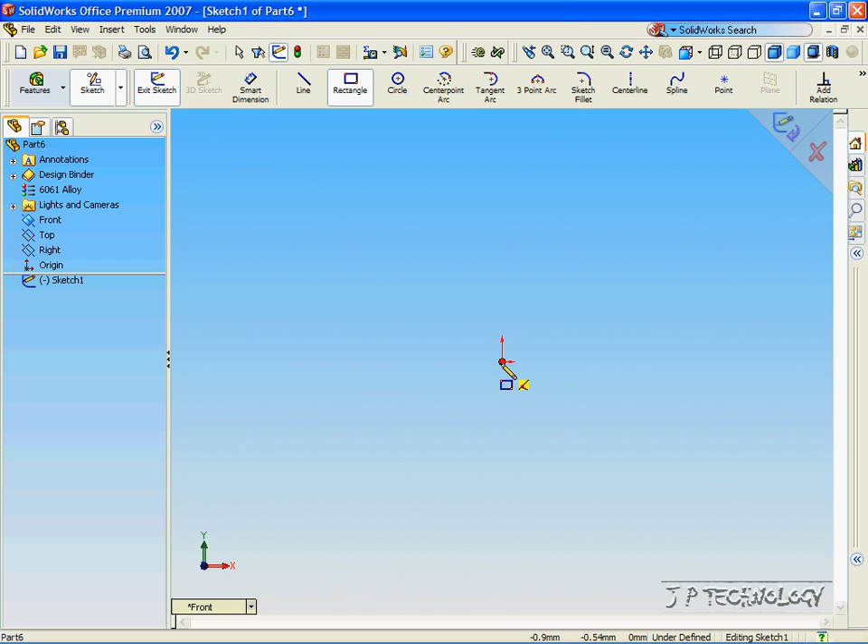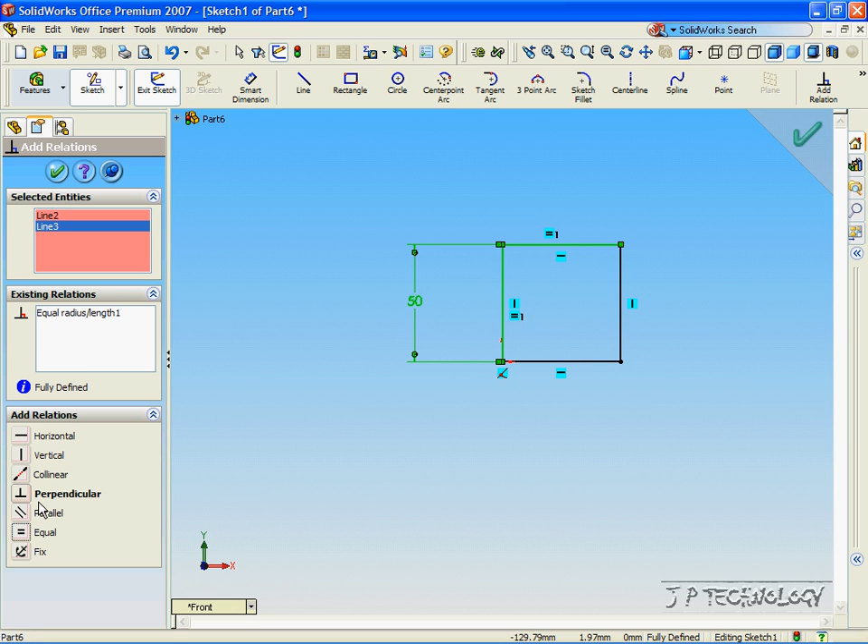Now, to extrude a part in SOLIDWORKS, we first need to make a sketch. So let's click Sketch, click Rectangle, click the front plane, and from the origin, let's draw a square. Now, to make this square exact, let's use the Smart Dimensioning tool and make it 50 millimeters. With the Add Relation button, click the length that we already made, and click the perpendicular line, click Equal, and now we've made a perfect square. Click OK.

Now, to extrude the drawing, click Features, click Extrude Base, and you can see what our extrude will look like. In this tutorial, I will be covering just a few of the actual extruding options. All the different extrudes are listed below. The ones I'm going to cover are the blind extrude, up to surface extrude, and the mid-plane extrude. The up to surface extrude is exactly the same as the up to vertex and up to body extrude, so I'm just going to show you one and you can do the rest for yourself.

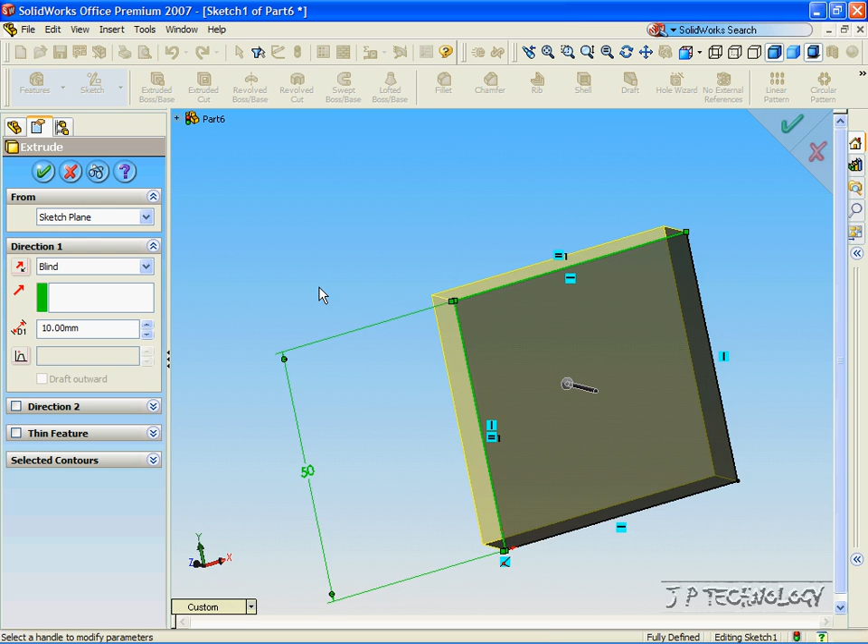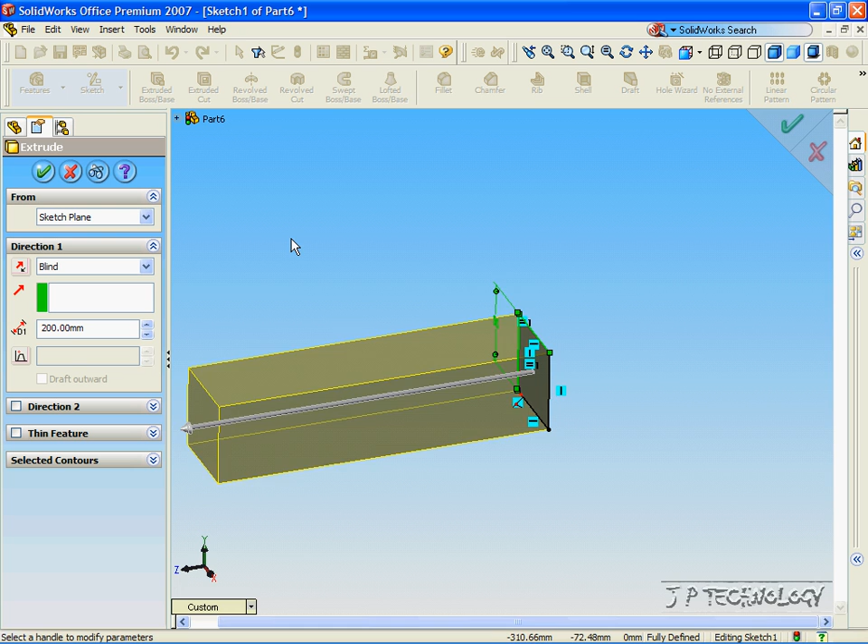Okay, so for the first one, we're just going to do the blind extrude. Click blind. For the blind extrude, it just comes out from the drawing as much as you want. Right now it's at 10 millimeters, and as you go up, it comes out more, and as you go back, it goes back more. So for this square, let's make it 200 millimeters. Click enter, and now you see a preview of what it will look like. Now to accept it, press the check mark, and you're done.

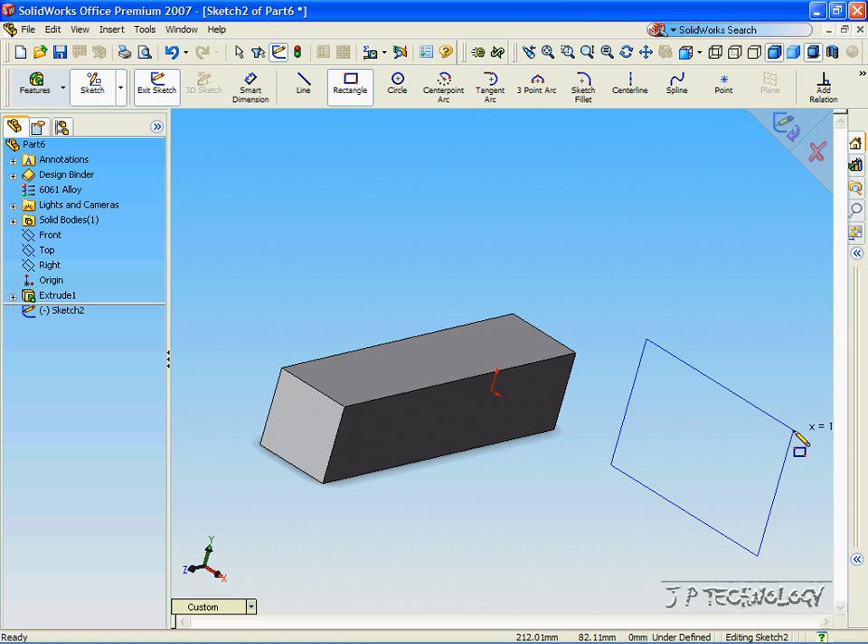Now let's go to the front plane, and we'll draw another square right beside it, going across the dotted line so it's still on the origin. Click Smart Dimension, and let's make this square 100. We'll use the Add Relations button again: click one length and the perpendicular length, and click Equal. Now we've made a perfect square again. Click OK.

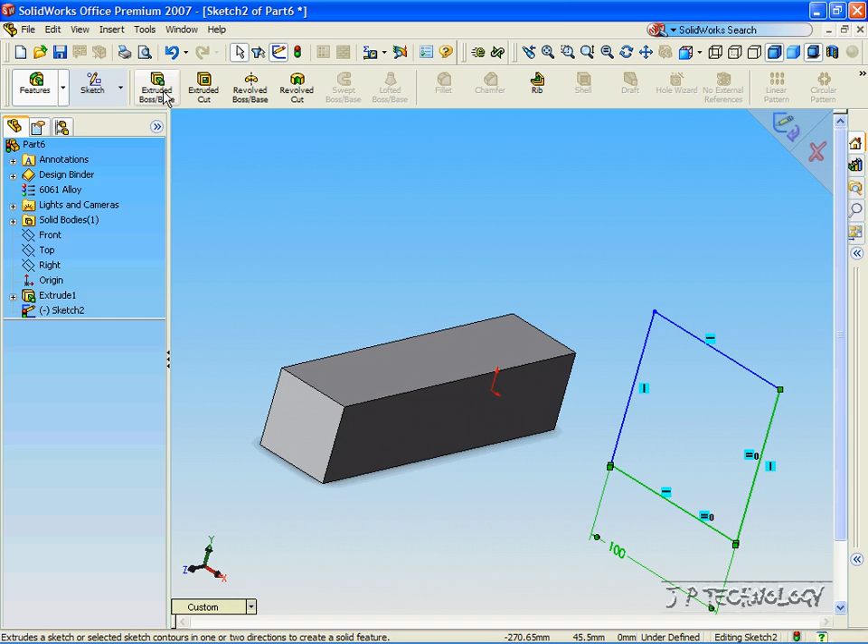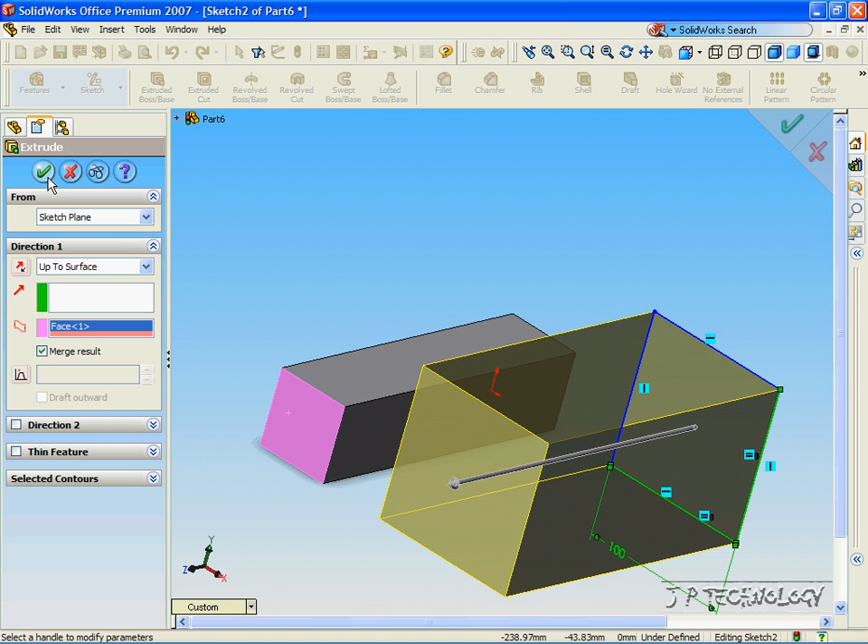Now click Features, click Extrude, and for this one we are going to extrude up to surface. All we have to do, since we want to extrude it up to that surface, is click it, and now it shows the preview of that sketch being extruded up to that surface. Click OK, and we have that.

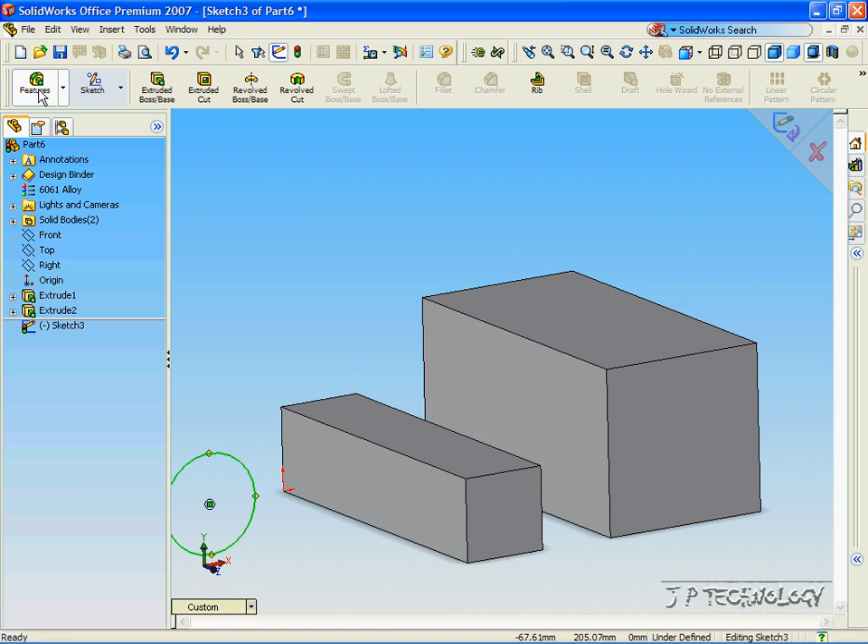Now click the front plane again, click Sketch, click Circle, and across the origin again we'll draw a circle this time, and type in 30 as the radius. Click enter, click OK, and for this one we're going to extrude it through the midplane.

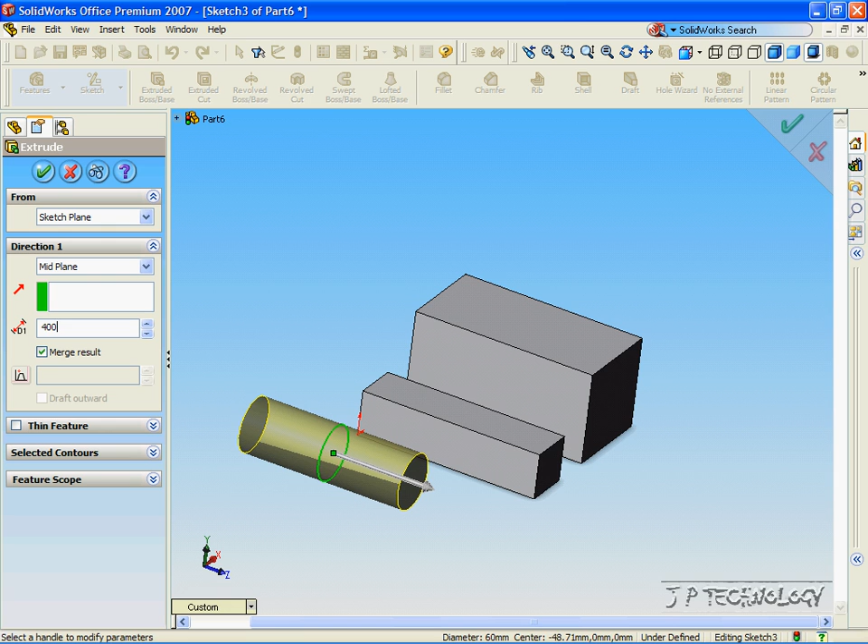Now, a midplane extrude starts off at the green circle and goes out equally on both sides. It's like the blind extrude, just that it goes halfway out one way and halfway out the other way. As we increase it, both sides increase, and as we decrease it, both sides decrease. For this one, let's make it 400. Click enter, click OK, and now we've extruded through the midplane. And that does it for the extruding tutorial.